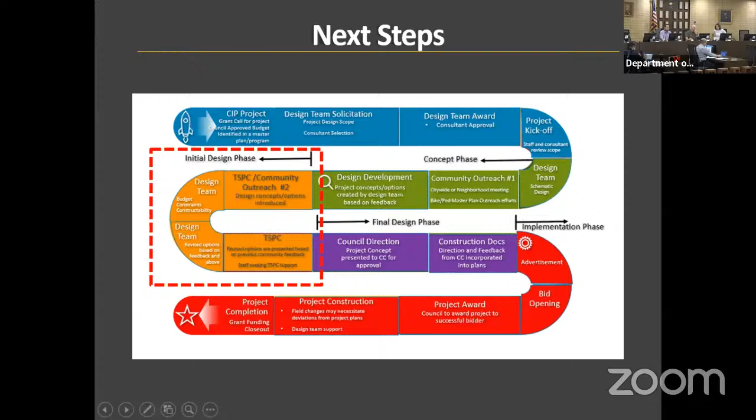So the now infamous Candyland chart that we point out. In blue and green here, those are the sections we've gone through. We started the project, we picked the design team, in green we got the concepts. Right now we're in this orange phase, the initial design phase, where we've been reaching out to the community and working with the Traffic Safety Commission to refine that before we go into the final design phase, which is going back to council and getting their blessing, as well as finalizing our construction documents. So we're still here, and we can remain here for a bit as well.

First intersection I'll look at tonight is Occidental and Chapin. You can see some of the issues here. It's a skewed intersection, which makes the signing and right-of-way a little tougher. Additionally, being skewed, it's offset, so that pushes the crossings further apart, and it makes the intersection quite wide. If you have vehicles at the furthest ends, they may not see each other or pedestrians, so it makes the right-of-way hard. That's why some folks may roll through a stop sign and then stop right as they approach someone, because they may not see it.

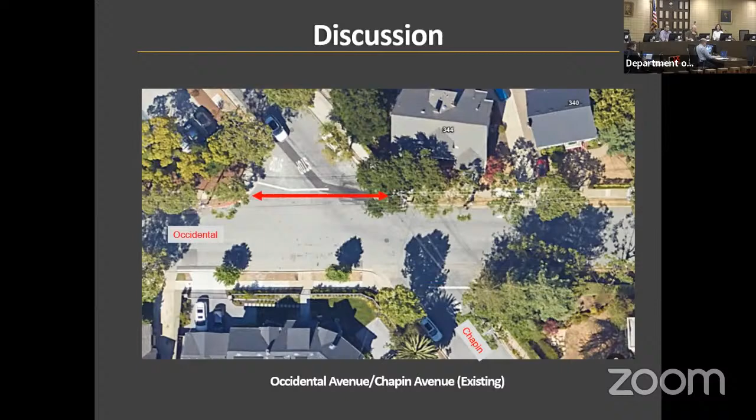At this intersection currently, we don't have marked crosswalks. In addition to not having marked crosswalks, when people are crossing, some of these crossings are extremely long, exposing pedestrians to vehicles for longer than ideal.

We've also, at this intersection, to help improve right-of-way, installed two stop signs on Occidental, which currently aren't there. And going back to the traffic island, we're tightening the intersection up, so vehicles should be progressing through it slower because they have to slow down as they approach it.

There previously weren't marked crosswalks, so not only are we adding crosswalks here, we're making them high visibility. This not only is more visible from distances, but it also lets drivers going through this area know that this is an active pedestrian area. So people are walking to parks, schools, and churches in this area.

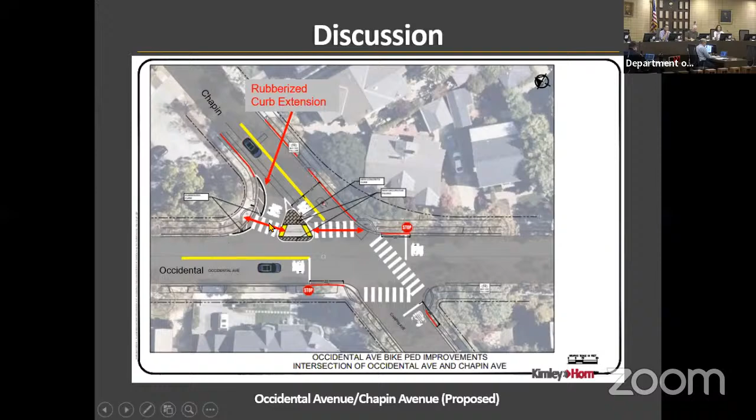And then installing some red curbing. Not only will this red curbing open it up a little bit, it also opens up the visibility for not only pedestrians being seen by vehicles, but vehicles being seen by pedestrians. So some of that's critical.

And some of these areas, as we know by law, are also getting red curbing because there's a new assembly bill that will require us to open up the intersections a little bit more by crosswalks.

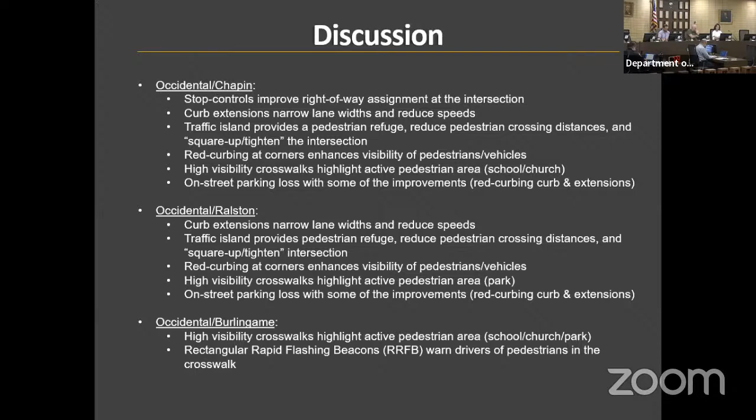Again, they're a warning device. They're not traffic signal devices. They flash, they let folks know, vehicles, that pedestrians are in the crosswalk. And yeah, that is that.

Again, tonight, the Commission's job or duty is hopefully we can determine support for the revised concept. Again, if we're not able to determine support, we can take this back and tweak it a little bit more. I think we're close, and then come back to the commission at a future date.

And then if we're good to go, then we can take that, formalize it, and then move forward at some point, bringing it to council and presenting it to them. Again, right here, we're just here. We're not all the way to the finish line yet. So we're here, but we're using this opportunity tonight to take yet more feedback from the community. So hopefully we get some more feedback and we'll take it from there.

All right. Thank you. Thank you, Mr. Wong.

And for the audience here, I just want to go through the process. So we're going to take a couple of minutes, the commissioners, and ask any clarifying questions of Mr. Wong. And then we'll have you, the public, come up to the podium if you want to make comments on this project. You'll have 3 minutes to do that. And then we'll see if there are any emails that we received on that. And once we conclude all the public comment, and there's quite a bit of people here, we, the commission, will then try and digest all those comments and make recommendation to Mr. Wong and the engineering department on a way forward. Okay, so that's our process for this segment.

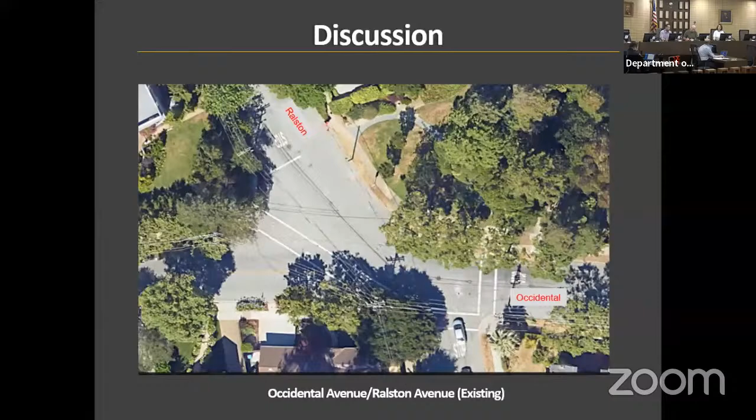The only question, Mr. Wong, and this is just more a curiosity. So the rubberized curbing, you showed 2 examples: one yellow painted, looked like really concrete curbs like you'd see in a parking lot, and then the one that's sort of snake-like and striped. What does the city envision our rubberized curb being? Would it be painted a solid white color? I just want to get an idea of how visible it actually will be, especially in dusk and evening hours.

Through the vice chair, we'll use this product, and I think it does come in different colors. However, these are the white stripes on there. They're typically painted reflective material on there. And while I know this community, we have the option of putting the delineators on top, but we also heard from the community that that's not something they supported, and we've got that from other communities as well, or in town. So we can definitely see getting a contrasting color there to make it pop a little bit more.

And you said possibly striping in between? Yes, there will be striping in there as well. Okay, thank you. Commissioner Ing? I want to give the time to the, so why don't I holster any comments or questions. All right, Mr. Wong, I did have several questions.

So if we go to Chapin. Yeah, okay, so right there. All right, so the right-hand turn there, is that a yield or is that a stop?

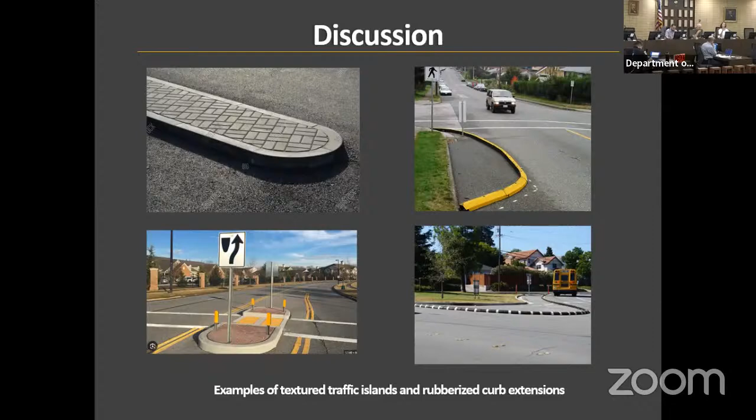I understand the concerns for aesthetics, and that it would be really nice to have these planted, but that does require a lot of money for upkeep, a lot of maintenance that could go away when a new recession hits or whatever, and you'd be looking at a little dirt lot. So they appeared to be quite small. I didn't actually measure the square footage. If you subtract out the crosswalk part that has to go through these pork chops, it looks like maybe 10 square feet. So I'm not sure about the bigger one, but it may not be possible to have a really nice park-like pork chop for safety reasons, as well as just practicality, whether it's actually going to be taken care of or not.

And the last thing is, I'm hearing that some of the neighbors are not loving the rubberized curbs and the bump outs to try and sort of tighten things up. We do know that when you tighten up an intersection, even if it's just visually, it does cause drivers to drive differently. And we learned this from the extensive project done in Lyon Hoag neighborhood. So it does work. There may not be a way to make it beautiful, and it does make some parking go away, but as a trade-off for safety. I'm not sure, if people really hated it, it could be something we could discuss about maybe leaving out of the plan, but I would leave it up to staff, because if you feel that will definitely make it safer and make cars travel slower, I think that really is the goal for your neighborhood, from what I'm hearing.

So pretty much I'm in favor of the plan as it stands. I don't see anything that's really awful or needs to be changed, but I'm willing to listen.

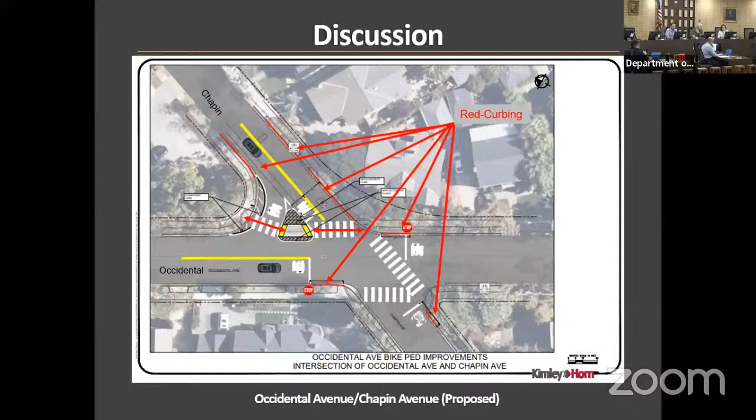Burlingame Avenue, can you flip to that real quick? I just wanted to confirm something. So is there a stop sign at Burlingame and Occidental? Yep, that westbound, I guess, westbound, yeah, okay.

Okay, so I think that's pretty good. Now the new stop signs are going to break that street up. I noticed people were not driving 25, they were driving probably 35 going down that street. So I think this will control the speed on that street as well, having stop signs at Chapin and Ralston. So I think that'll be a good thing.

And I didn't hear any opposition from homeowners saying don't put a stop sign in front of my house, I don't want to hear cars stopping all night long. But I think it is needed because I did observe a lot of cars traveling faster than 25 on that street when I was there last night. And there were, to the credit, quite a few people walking their dogs and pushing strollers. So I hope after this phase that through Vision Zero, we can look at lighting up those intersections because it's pretty dark.

Okay, any comments? There was a comment about making Burlingame and Occidental an all-way stop T intersection. While it may not meet warrants for that, we have to go through a series of warrants to identify the stop signs necessary. The one thing that does go away - these beacons - if this became an all-way stop, obviously it's controlled, so the beacons no longer are applicable. We couldn't use them because the guidance says they're only to be used at uncontrolled intersections. So it's just to put that out there. We've heard that the community wanted a ped crossing, and well, we had the opportunity, that's what we went with.

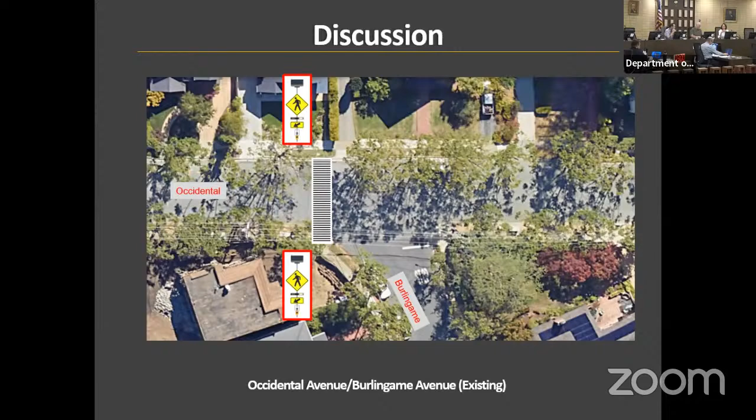Is it possible - I'm just thinking about what I've been hearing and looking at the difference between these two intersections - the pork chop in this intersection is so much bigger, like twice, three times as big as the other one. I understand this is a wider intersection, and I'm assuming that's why you made it so much bigger. Is it possible to make it smaller? Would that make people happy? So we can take a look at it.

That's something for sure, but in looking at the design of it, this crosswalk here - as we narrow this side up, because you end up pushing it this way, that means this crosswalk gets pivoted more, right? So we're trying to keep it squared up as much as possible, but that may be a trade-off, but we can definitely look at it. That's how we got to where we were. I was just thinking, as it shows up on this slide, the apex, the point - could that come down a lot more? But I know there are... We can look at that, but then it becomes... I just wondered, thank you.

Commissioner Ing, anything else? Mr. Wong, would you like us to vote on this? I think most of what I heard, people are in favor.

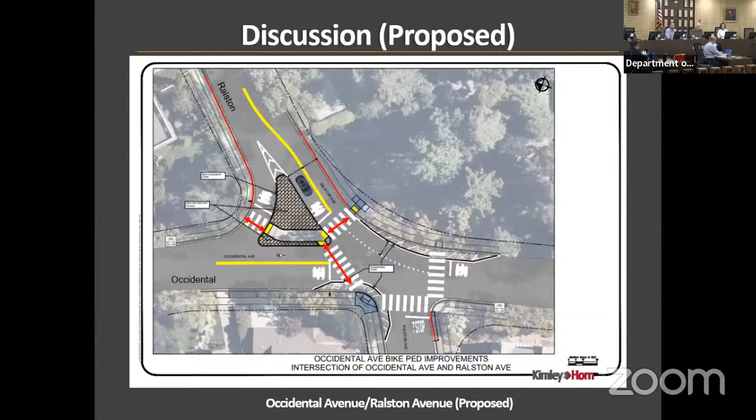Wong, so we'll see this again because we have not approved it yet. For the members, sorry, you'll have to attend another meeting, but we do appreciate all your feedback. I was there last night, and this is definitely an area that needs some work. We've got a very good engineering staff doing their best to make this a lot safer for everyone, and we appreciate everyone's feedback. Perfection's not an option, but we do our very best. So, all right, thank you.

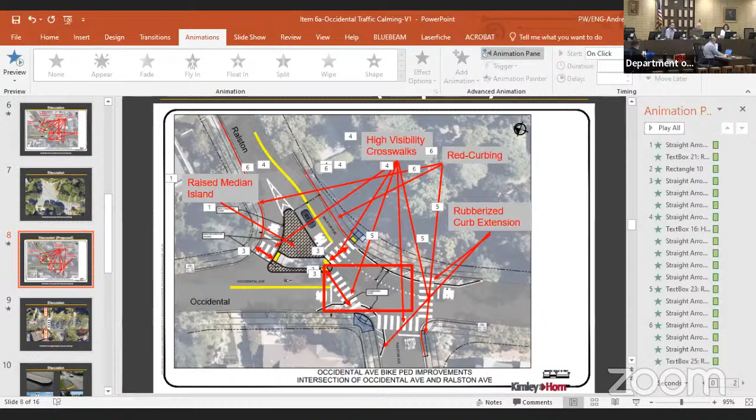So I'll close item 6A, and we will move on to item 6B. You're welcome to stay. Item 6B is no parking on California, at the intersecting cross street Broadway.

We'll give the room a minute to empty out. Say again? Yeah.

All right, so let's see, Mr. Wong, we'll move on to item 6B: amending section 13.36.020, chapter 13.36 - no parking during specified hours. This is in regards to California Drive at the intersection of Broadway. Mr. Wong, your staff report presentation, please.

Thank you, Vice Chair Martos. Again, this is a presentation tonight on the 1200 block of California and potentially changing the parking restrictions along that. Similar to our last presentation, we'll give the background, since it's been a while, have the discussion, obtain some additional feedback, and then determine the next steps.

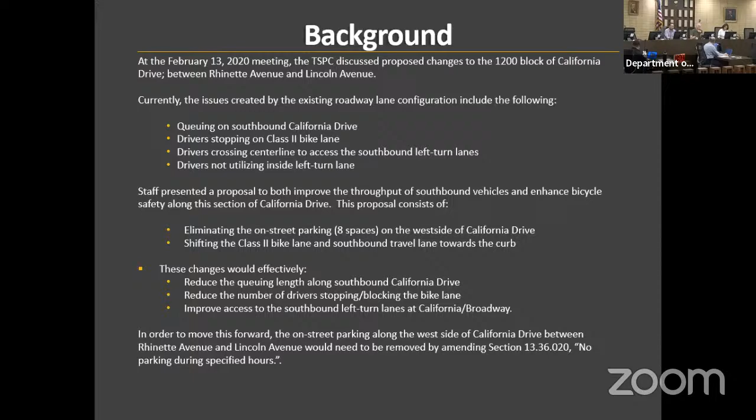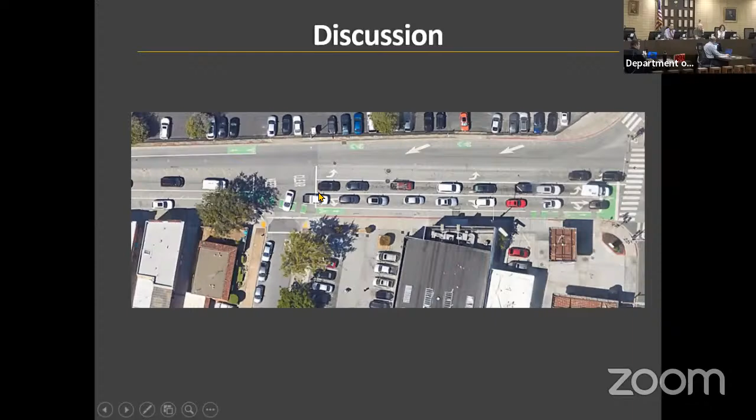Again, you can see the area here. We have the on-street parking, we have the Class 2 bike lane, and you get to see this vehicle's already shifting over probably to go southbound, but can't go any more forward. The southbound through lane, just a little bit of a striped island, the northbound lane, as well as the northbound bicycle lane that just happens to start right here at Juanita.

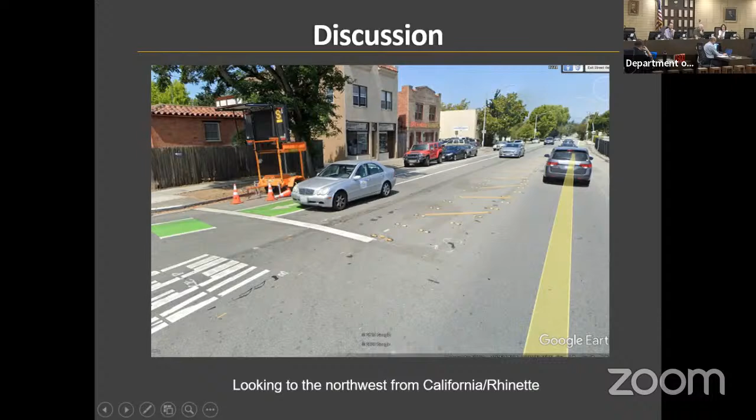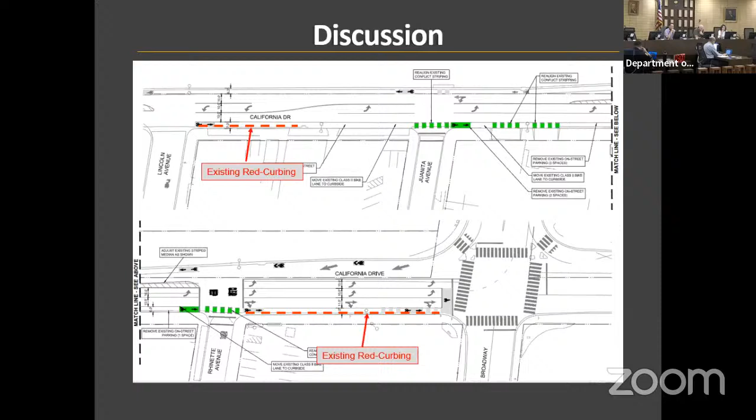Right now we have existing red curbing between Rhinette and Broadway, as well as just south of Lincoln. Proposed red curbing is 2 spaces just north of Juanita, and then the rest between Juanita and Rhinette to be red curbed. And then the bicycle facility pushed up against the curb.

In addition, as I mentioned, to help the left turn queuing, we open up a little bit here, so you'd have this extra space for left turn vehicles to queue up in to keep it a little bit more. So your pinch point is moved here, but it's not at an intersection and it's not blocking the bicycle lane.

The last time, I think the comments that came back, they did a little bit of analysis, so we looked at 3 scenarios. Scenario 1 is what's out there now using existing volumes, with the bicycle facility in place, the lane configurations as they are. Scenario 2 used our existing volumes and set the lane configurations up prior to when the bicycle facility's in, so you can see what we roughly would have had before versus now, but using the same traffic volume, so you're all kind of equal. Scenario 3 is showing the proposed improvements, the changes.

At Broadway, California, you can see right now we have roughly a level of service D, roughly high 30s, low 40s - that's seconds of delay per vehicle waiting in each of the queues. And it doesn't change that much with any of the scenarios, it's roughly the same. Looking at table 2, that's the queue lengths at Broadway, California, so this is how far back it's queuing.

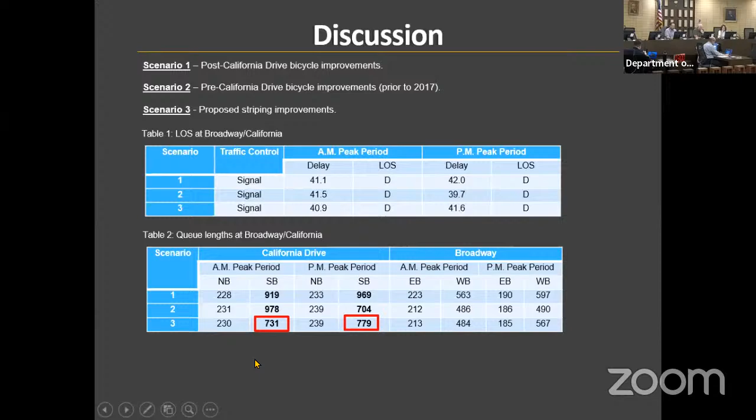So that was one question that was asked last, and the other was, and I think most of the concerns here are the removal of the on-street parking, what to do with it, because some of the comments we got were - if you go back, sorry - we had the Audi lot that formerly used to be, as I mentioned, public parking. And there were a lot of questions, will we be able to get that back?

However, working on the Broadway grade separation project, the parking for the station would be over where the opposite side be on Carolan and Broadway, where the car wash is. That's the new proposed location for the Caltrain parking. This area would be needed for the walls and potentially moving the bicycle facility up on there. There's plans for this as part of the grade separation that don't involve parking or any extra space.

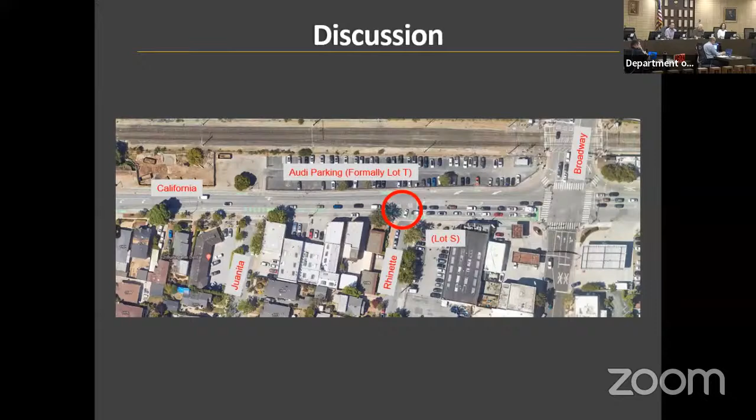So getting back to that. So that's not an option.

So we looked at this parking lot here, parking lot S. Currently there are 15 2-hour spaces, 7 10-hour spaces, and an ADA space. There was talk maybe we can change some of the parking restrictions or durations there to make it more accommodating for the loss of the on-street parking here, whether it be short-term for clients or even more long-term if there's more employees to try to help address them.

Feedback and observations we got from Sergeant Roberts and his parking enforcement staff was that the lot is usually full by midday, but then during the afternoon it trickles off, which kind of indicates that it's not being utilized for long-term parking as much for the 9 or 10 hours. But during the weekends, it's quite busy given the activity on Broadway.

So tonight, hopefully that's some of the feedback. If this is something that the community is interested in, we can try to at least get an idea of which type of parking they prefer, long-term, short-term, even shorter term. Potentially we could put some 24-minute parking in there, but some of the questions that came up, we might have the ability to have some flexibility to make some changes here.

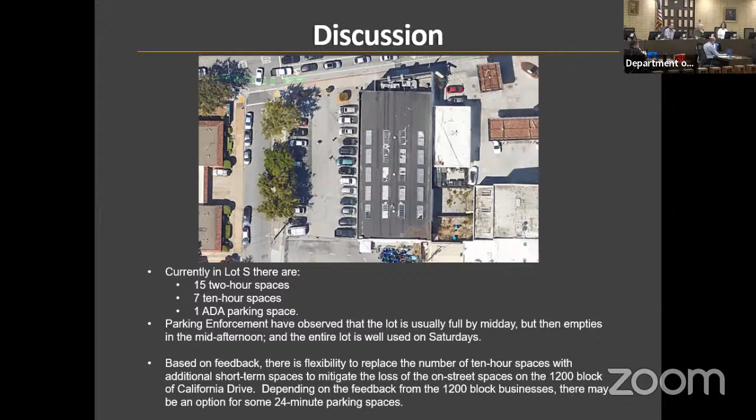However, tonight, what we're talking about is Chapter 13.36 parking limitations, and specifically 13.36.020 parking during specified hours. As you can see, the current municipal code says no parking during specified hours. It is unlawful for the operator of any vehicle to park the vehicle on the following streets on the designated hours and days as follows.

This particular code lists different streets. We get to number 6, which is California Drive. The one that's in there currently says the west side from Juanita to Broadway between 7 a.m. to 9 a.m. and between 4 p.m. and 6 p.m. So that's the one section of this particular municipal code that we're interested in tonight.

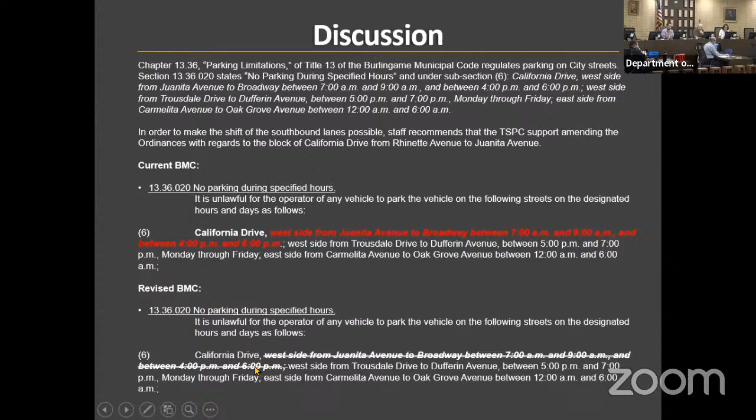The revised one would have everything except for that one section. We would be removing west side from Juanita to Broadway, 7 to 9 and between 4 and 6. That would be removed and everything else will remain. So that would be the change we're seeking.

So for tonight, again, we'd obtain a motion for the changes if that's desired based on feedback. Staff would then go through our normal process of taking this to the city council for them to introduce and adopt. However, moving forward, this project where we don't have funds, it hasn't been identified, so we'd have to go back through that process, either through the mid-year budget or through another project, to try to get this work done if we were to move forward.

And yes, commission, I'll turn it back over to you. All right, thank you, Mr. Wong. So we will proceed with commissioner questions, and then we'll move to public comment, and then we'll wrap up with commissioners' recommendations. So let's start with Commissioner Ng.

Did you have any questions? No immediate questions. No questions.

Commissioner Israelite, any questions? Yes. How many spots will we lose? I believe it was about 6. Also, how many spots will it be after the new regulation that makes it illegal to park right by an intersection?

So it's roughly six spaces between Rhinette and Juanita, from here to here. There are 2 additional spaces in order to get the left turn sorted out, because there's driveways here and there's red curbing. So this is only the parking that's remaining between Juanita and Lincoln, so it'd be 2 spaces.

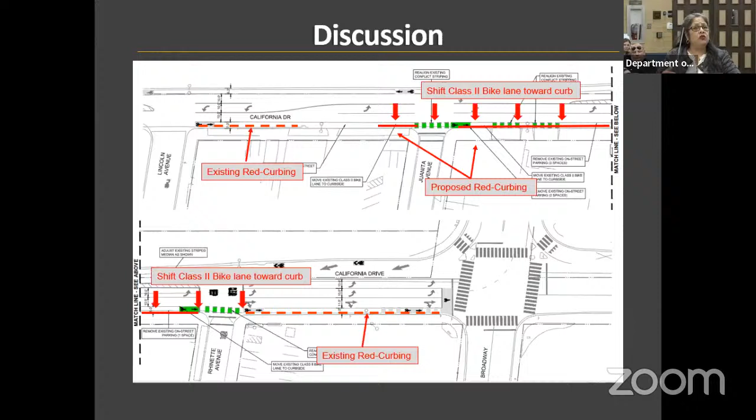Also, we can use plants that are native to this area, endemic to here. They don't need much maintenance, they don't need water except rainwater. We can beautify the city using the spaces we already have. Along the railroad, we can construct something beautiful - driveways, pathways, sitting areas - and it won't look ugly anymore. You can find trees that are suitable for these conditions.

Eucalyptus are beautiful and absorb carbon dioxide - we can maintain and sustain them. Instead of having electrical wires overhead, why don't we put the wires underground? This prevents hazards from the trees that we need to breathe. We need oxygen, we need trees, and they consume a lot of carbon dioxide in those areas, especially areas heavy with traffic. We need greenery, we need to have healthy air to be healthy.

You're considering only safety. Yes, I understand safety is important and I value that. We have places to keep safe by reusing and refurbishing what we already have. Thank you.

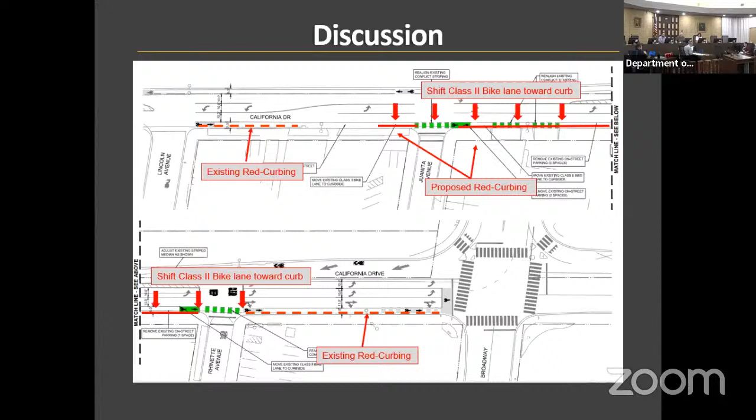It doesn't seem to be coming anytime soon from anywhere else. You've got a budget, start budgeting for this project. So in short, if you're stealing parking for a mild fix to a traffic issue directly related to the backup caused by the train tracks, then absolutely no. If you're doing it to make the bike lane safer, then it's truly in the public good and is a more justified rationale. Thank you.

Next email is from Dominic Sang. I am writing on behalf of my parents and their fellow business owners who operate between Rhinette Avenue and Lincoln Avenue on California Drive. We are deeply concerned about the city's proposed plans to remove parking spots in this area. This change poses a severe threat to our businesses and community, and we implore you to reconsider this decision.

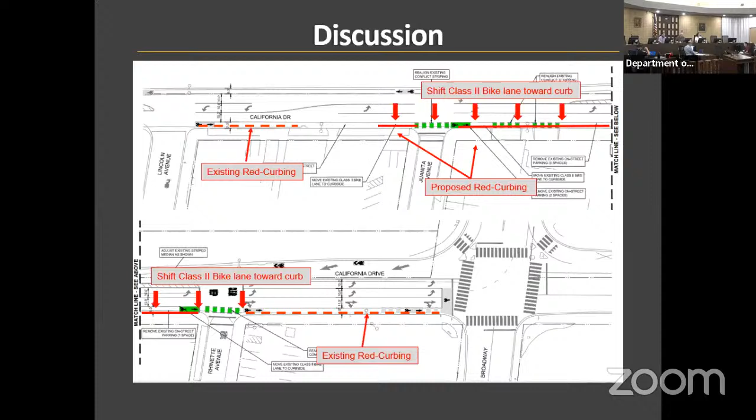Our businesses are already struggling with the limited parking availability. The removal of these crucial parking spots would exacerbate the existing challenges faced by residents, workers, and commuters alike.

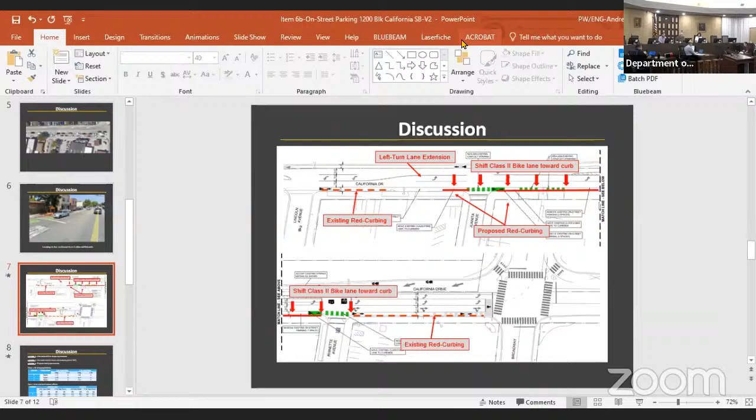Furthermore, the recent leasing of the nearby parking lot by Audi has significantly reduced the number of accessible parking spaces, making it even harder for our customers and employees to find parking. The proposed removal of these parking spots will have a devastating impact on our businesses. Many of our customers rely on these spaces for convenient access, and without them, we fear a significant decline in patronage.

This change threatens the livelihood of many small business owners in our community, including my parents and their neighbors. We urge you to consider the following points. The current parking situation is already inadequate for the needs of residents, workers, and commuters. Removing these parking spots will further strain the limited parking resources and negatively impact local businesses. The recent leasing of the nearby parking lot by Audi has already diminished available parking, compounding the problem.

We are prepared to fight against this proposal to protect our businesses and community. The removal of these parking spots is not a viable solution and will have far-reaching negative consequences for all affected parties. We respectfully request that you retain the existing parking spots on California Drive between Rhinette Avenue and Lincoln Avenue. Preserving these spaces is essential for the continued success and vitality of our local businesses and community. Thank you for your attention to this urgent matter. We hope for a favorable resolution that supports the needs of our businesses and community.

Is that it? All right. Thank you.